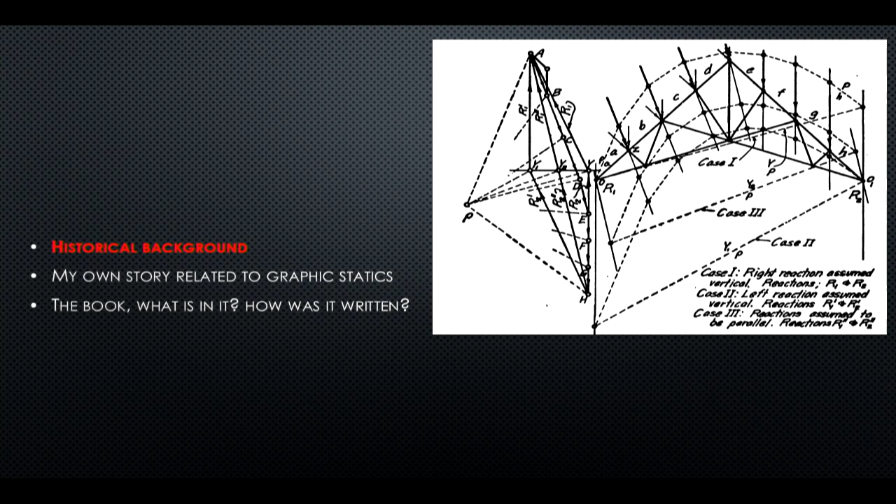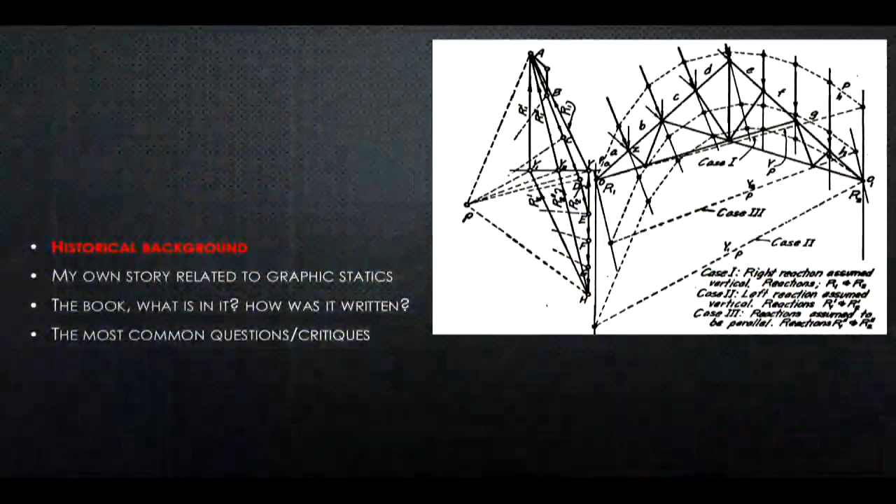And then I want to talk about my own story. How did I get involved in this process? Some of the people that I merged with and I consulted with over the years. People often ask how long it took, so that's one of the frequently asked questions. And then I'll get into the book itself, kind of a description of graphic statics, a little bit of what motivated me to choose the topics, a whirlwind tour through that. And then I put together commonly asked questions and commonly asked critiques. So the last part of the talk is me answering some questions that people have asked over the years.

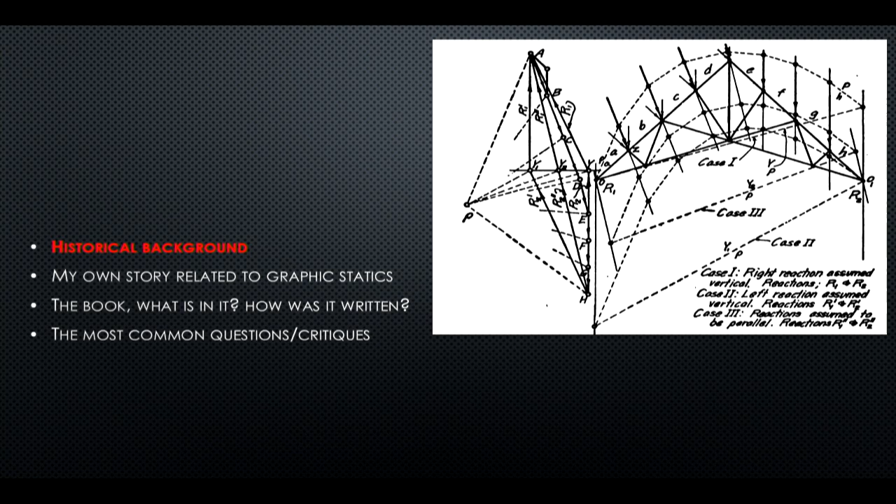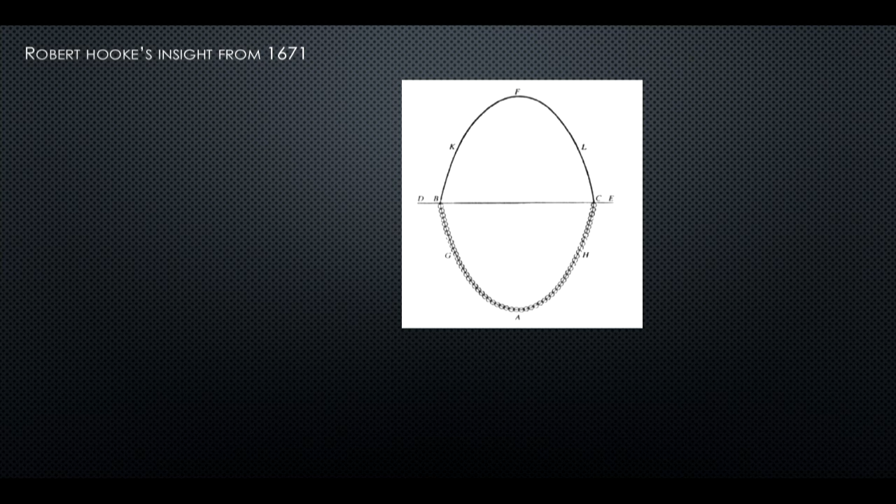Okay, so we begin with this picture. And Robert Hooke, 1671. So we're in the 17th century. Most people in the room, if you're an engineering student, will recognize Hooke from Hooke's Law. But we use Young's modulus in Hooke's Law, so that's another whole long story that we won't get into. But Hooke was a fascinating person and very mysterious, and some people say he was a real jerk to his colleagues, but he certainly didn't trust his colleagues. So the insights that he had were cryptically written in notebooks, on the margins of notebooks. So those Moleskine notebooks that you're writing in right now, those will be collected by your biographers. So take care, collect the notebooks.

And here is what Robert Hooke wrote. The true mathematical and mechanical form of all manner of arches for building, with the true abutment necessary to each of them. A problem which no architectonic writer, I think Doug is an architectonic writer. I don't really know what an architectonic writer is, but no architectonic writer hath ever yet attempted, much less performed. And here's the answer.

And incidentally, I want to have a manservant, right? This is really cool. If you have a manservant to take care of your notebooks, you've made it. So the manservant found the notebook, and the manservant was good.

He figured it out. Has anybody figured this one out yet? Raise your hand or shout it out if you figured it out already. The answer is ut pendet continuum flexile sic stabit contiguum rigidum inversum. So I don't know how many of you went to Catholic school and studied Latin, but I think you could put it together, right? As hangs the flexible chain, so stands the rigid arch, but inversed.

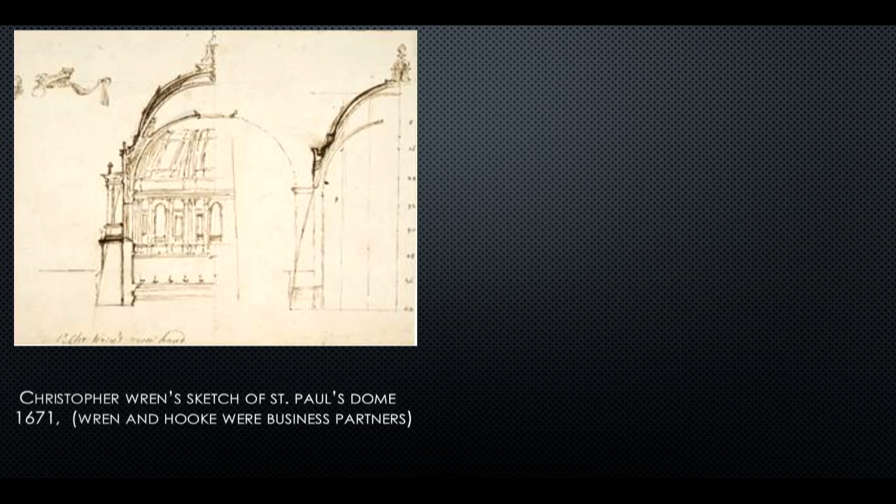So that idea, and this is a crazy part of the story, was taken by, who is this on the left? Can anybody take a guess? Robert Hooke's era. That idea was taken by Christopher Wren. Christopher Wren and Robert Hooke were business partners. After the Great Fire of London, there was huge work in infrastructure renovation. So these guys were business partners.

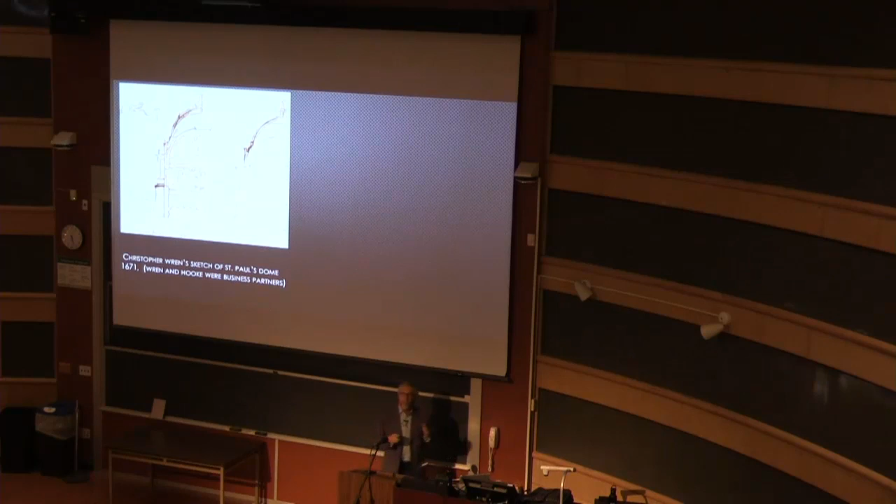They were making money. And Hooke whispered into Wren's ear, hey, I heard you're building a church. It's called St. Paul's, right? Yeah. Why don't you use this chain mechanism? So it's like a secret. The chain is within the two vaults of St. Paul's. It's not one vault or the other. It's buried in there. That's in the 17th century.

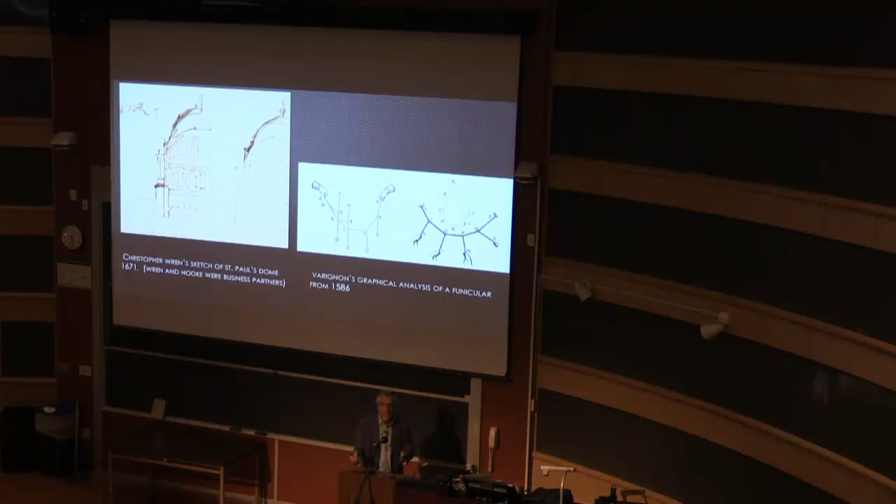But if you're a real historian, you just keep going backwards further and further, all the way back to 1586, and Varignon used this technique. And I love these pictures by Varignon here. On the left, we have somebody holding up a rope, and we have four forces. Gravity is down, so those forces are vertical forces, and they're pulling the chain down, and the chain is straight between the forces. I think it's intuitive. Somebody nod. It kind of makes physical sense. Thank you for that nod, Rob.

So now Varignon takes it one step further, and I love the little hands, all the little hands here, right? They're all pulling, and do you notice they're pulling at different directions here, right? So they're not just pulling down. I think many archies in the room and many architecture students in the room would have trouble solving the statics of the picture on the right. It's not a trivial problem to solve algebraically.

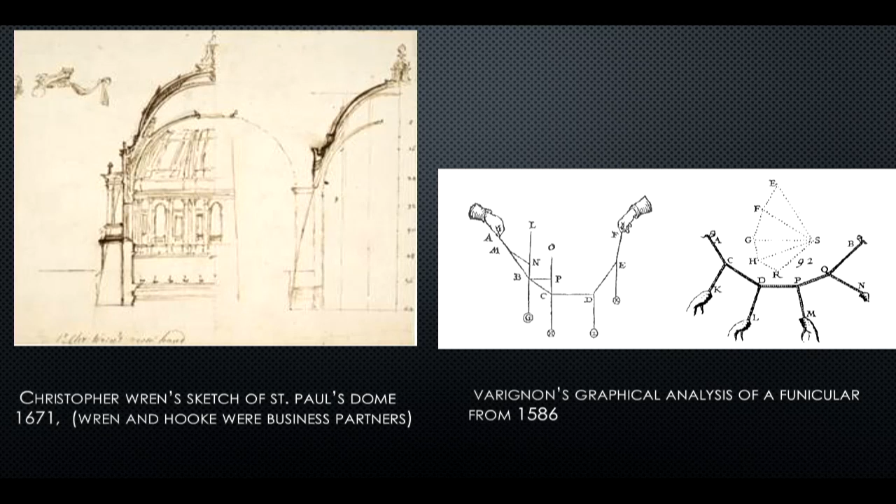And it was solved closed form exactly by Varignon in 1586. One of the things that drives me crazy whenever I talk about graphic statics with other engineering professors is they say, well, I do graphic statics, you know, I show some of the forces as a bunch of vectors adding up. So what do they mean by that?

They say, well, there's a force here, and that's this guy's hand, letter K, and I'm showing it as a red arrow because Al knows that forces are red in nature. And we draw it to a different scale. This is important here. The scale of the force diagram that I'm going to sketch up here has to be comfortable to fit on a page.

This might be 100,000 pounds or 750,000 pounds in a structural engineering application over a 30 or 40 foot span or whatever it is. So you draw the form to some scale, and you draw the forces to another scale that is independent of the first scale. They have nothing to do with each other. So you draw a diagram of your form, and on the same page you draw a diagram of the forces.

The forces now, I think everybody in the room knows what's happening here. You do this in physics, right? Head to tail, head to tail. This is vector addition. And at the end, there's an equilibrating force. And what is the equilibrating force going to do here? It's going to go up or down. The equilibrating force, this is the easy part. Up, yes, it's going to go up, right? And we're showing it as a dashed line. This is not graphic statics. This is simply vector addition.

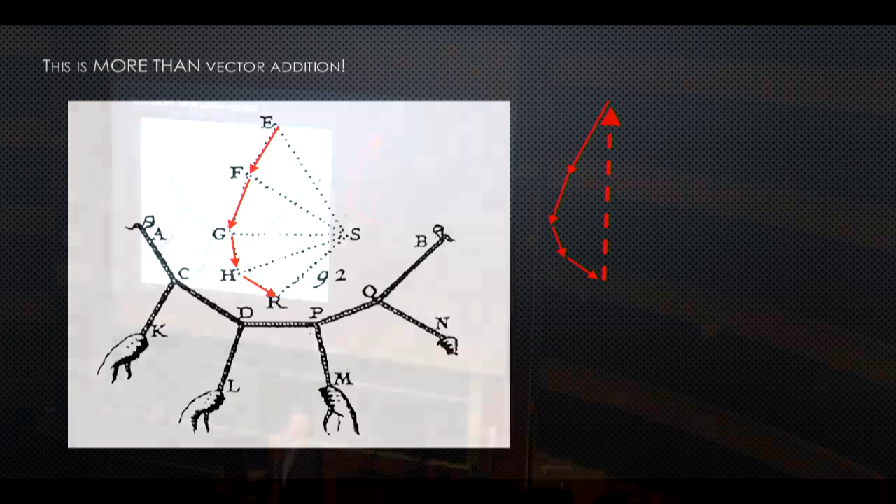There's something else in this picture. Not these guys with the hands, but this thing here. This is called the force diagram. So this is the form diagram. This is the thing that we're designing and the thing that we're analyzing. And I'm going to talk about that a little bit. This is a design tool and an analysis tool simultaneously. And this is the force diagram.

If you move the pole, you can get larger forces and a smaller sag in the cable. So the form diagram and the force diagram are linked, and they are reciprocals of each other. So this idea is super profound, this idea of reciprocal geometry and projective geometry. So in the 19th century, mathematicians studied projective geometry. In the 19th century, civil engineers studied projective geometry. Projective geometry, that thing that art students study now.

How might something in 3D be projected on horizontal planes off to the side or vertical planes? So this idea of depth of field, perspective, all of that, that was studied by mathematicians, and civil engineers could do projective geometry in their head. One of the major authors of projective geometry was Luigi Cremona in 1888, and Cremona wrote a book on projective geometry, and he was using these graphical tools to solve calculus, to solve differential equations.

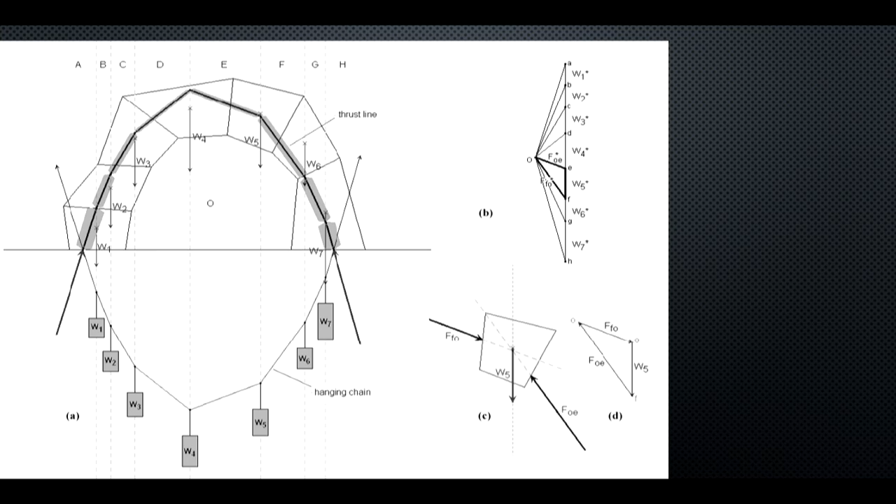Gothic masons knew these secrets, not as graphic statics with rigorous analytical tools, but with a study of voussoirs. How much does this block weigh, this beveled block that's cut? That's W3, and there's W3. How much does this voussoir weigh? That's W4. It's coming down. And the Masons Guild, that secretive Masons Guild, which we still have even in San Luis Obispo, we have a Masons Lodge downtown, they had it in their notebooks about the link between form and forces. They didn't have this, though.

This is the force diagram with that arbitrary pole, but I put that in here so that you see the parallel lines of the force diagram linked to the form diagram.

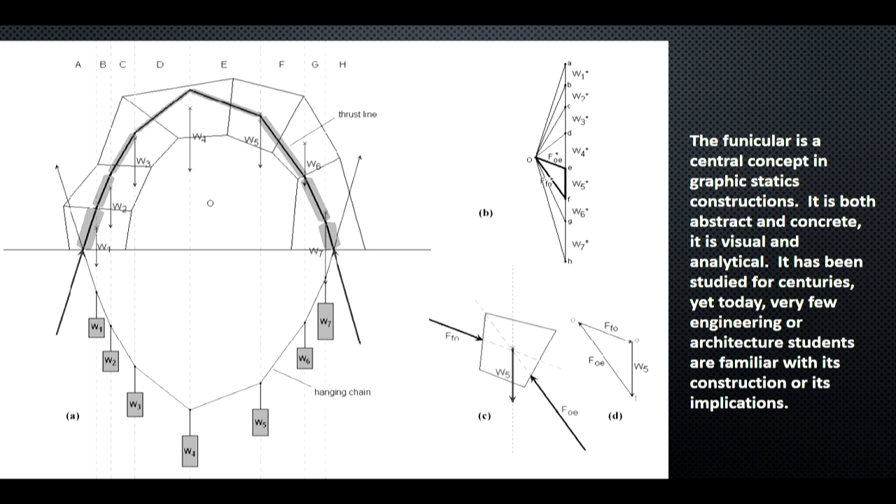So one of the weird things about this, when I study this, my head is exploding, because I went, as Al said, to pretty big name schools, right? Nobody ever mentioned this to me in the history of my life. And when I look at it, it's so profound when I realize people have studied this for centuries. Every civil engineer on the planet knew this material in the early 20th century. This was part of a civil engineer's and an architect's training. What happened? Well, we'll try to unpack that in the fourth part of the lesson.

So in 1888, we have Professor Carl Culmann really codifying this with his classic book, which is really out of print. I don't have this one, Graphische Statik. And Ritter was the professor or a colleague of the chief designer of the Eiffel Tower. My Arc E 260 students, who was the chief designer of the Eiffel Tower? Maurice Koechlin. Let's give Sarah a round of applause there. Very nice. So Ritter worked with Koechlin on graphic statics. The Eiffel Tower was designed and analyzed exclusively by graphic statics. We do it in a simple way in Arc E 260.

Ritter was a colleague of Koechlin. Culmann was a colleague of Koechlin. Culmann was Ritter's professor at ETH Zurich, the finest architectural engineering school on the planet, despite what my boss says here. It's ETH Zurich. And Ritter was Robert Maillart's professor. So Robert Maillart, who we know from our history class, Salginatobel Bridge was a masterpiece of graphic statics. Culmann was Maillart's grandfather in some sense here.

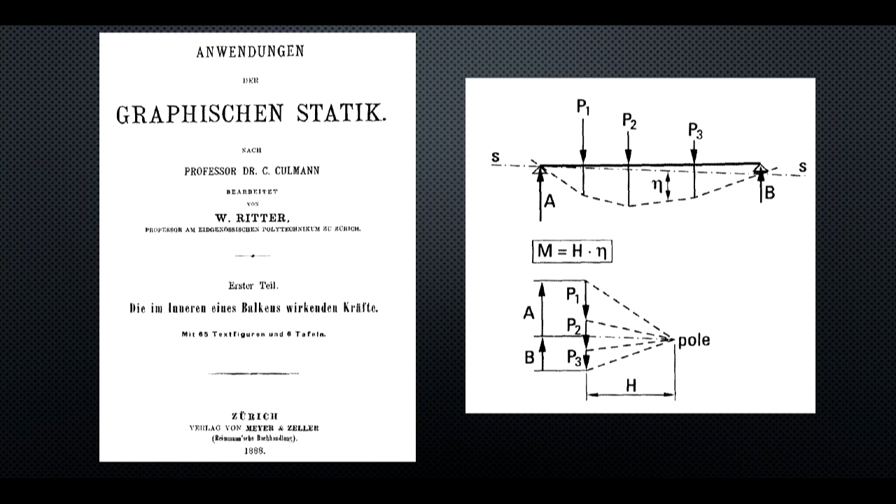But look at what Culmann is saying. Okay, ladies and gentlemen, if you order today with graphic statics, you can get equilibrium, no problem. You can get the centroid of forces, no problem. I didn't even talk about it, but it's in the book. You line up the trajectories of the beginning of the form and the end of the form, where they intersect, that's the centroid of all your loads. It's easy peasy, super easy. And it makes a ton of sense because those are axial forces. Everything boils down to an equilibrium of a point.

But Culmann is saying if you order today, before 6 o'clock, I will throw in something. And most people in the room should be able to answer. What is he going to throw in at no extra cost for a beam subjected to lateral loads? What does this look like, ladies and gentlemen? That thing under the beam. The bending moment diagram. So you get the bending moment diagram for no extra charge. How do you get the bending moment diagram? This is crazy. Watch what happens.

You make a funicular, you just put a pole down, it doesn't matter where you put the pole, and the funicular starts at the pin. You really have to start at the pin because there's two unknowns there. And you draw the funicular, and it ends where it ends. And then you draw a line back to the funicular. That's called the closing line, this dashed line here. The vertical distance from the funicular to the closing line multiplied by the horizontal span of your forces. This is a force diagram. This force times this distance is the bending moment at any cut. It's super, super cool. And it works exactly.

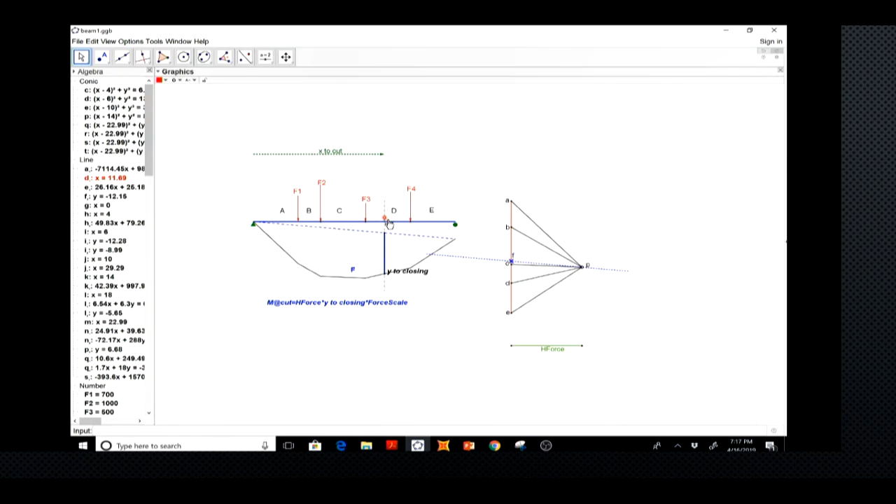So how can this possibly work? I'll just breeze through this really quick here. So you drop down loads from A to B to some comfortable diagram. You put the pole wherever you want. This is the closing line. And you can make the pole anything you want. The closing line ends where it ends. It's that distance multiplied by this, and I call it H force, a horizontal force. It's actually the horizontal force in the cable. If this was a physical cable, it would be the horizontal thrust, which is going outwards for us in that problem there.

The highlight, the zenith, the best moments of graphic statics happened in 1921. And people ask me, who's your competitor for the book? This is my competitor, and he kicks my butt. This book is amazing. I mean, it's totally amazing. You can get it as a PDF for free. I don't recommend that, though, because there's plenty of copies for like $7. You could still get this book by William Wolfe. Our dean has this book on her bookshelf.

This is an important book. It's literally amazing. The stuff that he does in here is overwhelmingly beautiful, incredibly detailed, richly complicated. Here he's analyzing an enormous truss frame object, and he's designing it simultaneously. You get every force in every member, and you could redesign everything. I can redesign everything by sliding a mouse, but he would have to redraw these pictures. But the geometry was not overwhelming for these people who knew projective geometry.

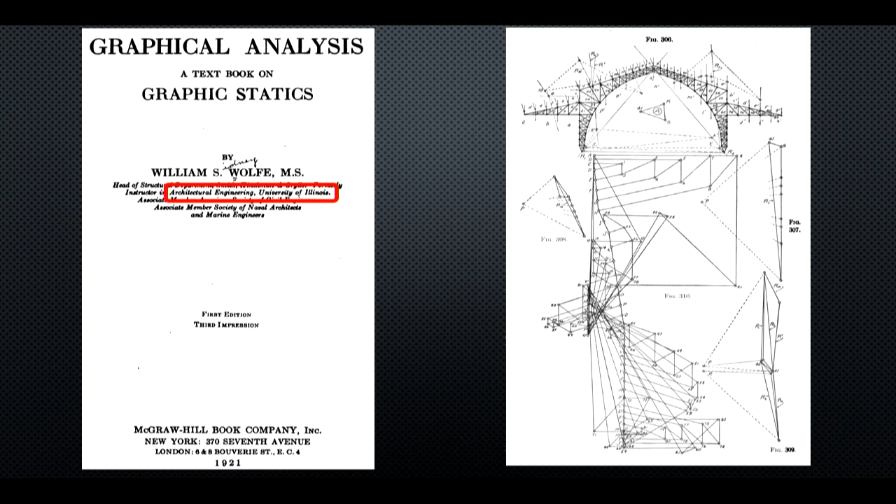I want to give a little shout out to architectural engineering here. He was a professor at my alma mater, University of Illinois. And I channel this guy. You know, Scale Factor can attest to me dropping some F-bombs at the dining room table while I was writing the book. But I'm channeling Wolfe. Like, I really got into his head. I think he was whispering in my ear.

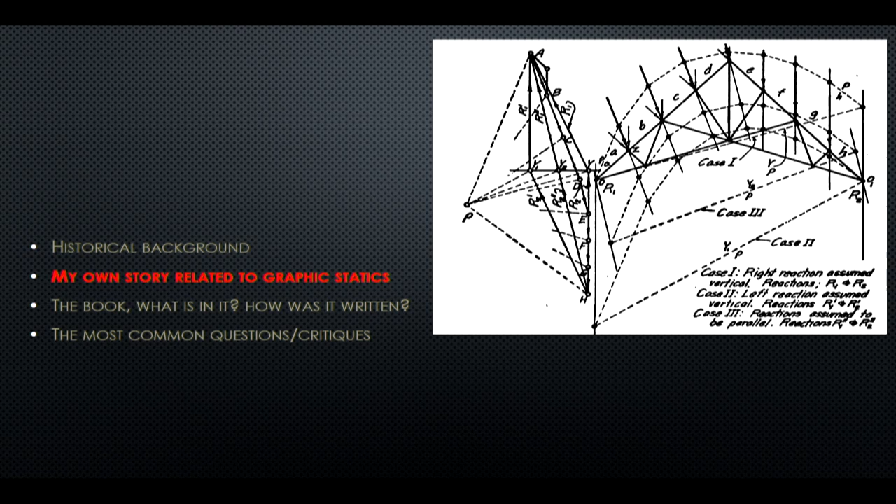Just want to talk a little bit about this picture one more time. This is a crazy example, and I recreated it in the book, but I gave him total credit for it. It's a truss. It's got gravity loads, and it's got wind on one side of the load, but it's an indeterminate truss. There's a pin at the left and a pin at the right. And what Wolfe is doing, he's saying, how can I shape the truss for this load such that the horizontal component is the same on either side so that I can simplify my connection design? And he goes through three trials in here.

And this is so deep, I can't overstate what's happening here, because this is the link to the Airy stress function, which I've talked about with the graduate students a few times. There's a direct link between these shapes and the Airy stress function, which is a super high-end theoretical, but practical construct. Okay, so that's the historical background. I'll speed it up a little bit.

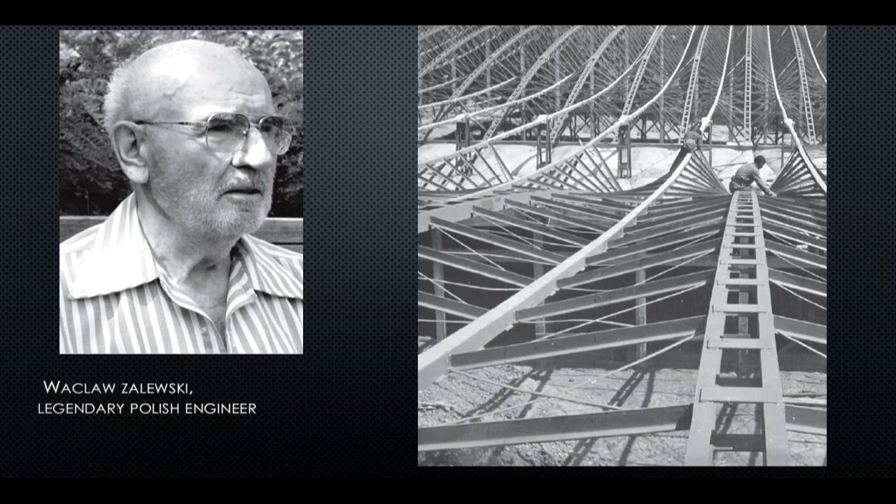My own story. How did I get involved with all this? It really does begin in the modern era with Wacław Zalewski, a brilliant Polish engineer, and then he became an educator at MIT. Zalewski died, but he lived a good long life. I think he hit 100. I spoke to him on the phone a few times, and he was totally blind for many, many years at the end of his life. But he wrote these books, being blind.

And I asked him, I said, how could you have such powers of concentration? And he says, when I was a young boy, I fled the Nazis, and I hid in the forest. And I learned to concentrate when I was hiding under a tree in a forest. This is what he told me. And he was an engineer, and this is a grocery store. It's called the Super Sam grocery store. It's a gigantic grocery store in Poland, and he's using graphic statics to design and to analyze these magnificent structures.

So Zalewski meets Ed Allen, and most of the architects in the room know Ed Allen. You've used the Architect Studio Companion, the big fat book. He's written a whole bunch of books. So Ed Allen partners with Wacław Zalewski on the first book, and it's called Shaping Structures. And that title is really nice because this is a design tool. This is not primarily an analysis tool. This is really a design tool. What shape should I have for my building such that I can control the forces, even if it's statically indeterminate?

So they came up with this book. I must admit, I was given this book. You know, professors get books, and I opened it up. I'm like, what the heck is this? Like, I had no idea what was going on. I didn't learn the material. I kind of put it aside. And a lot of other people did the exact same thing. So the sales were really pretty bad on Shaping Structures.

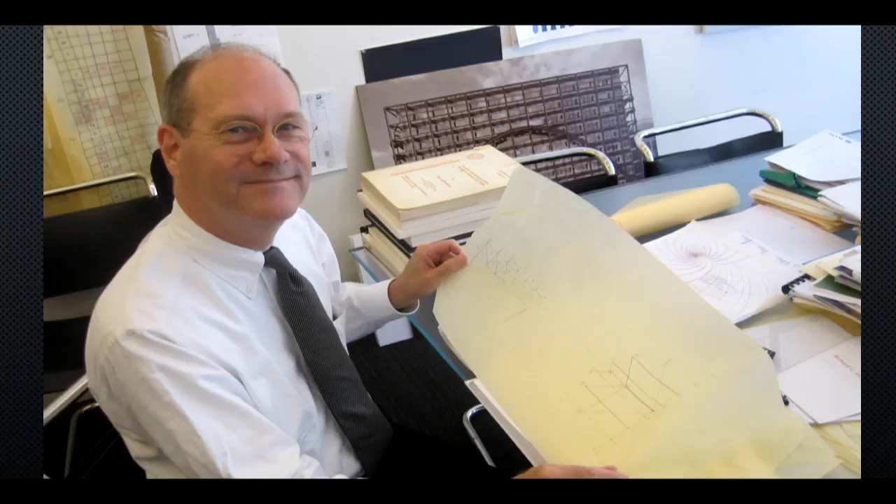And then something else happened, and I think it's really important to shift gears slightly. John Ochsendorf's student who didn't show up on this picture is Michael Ramage. Michael Ramage and John Ochsendorf designed and constructed the Mapungubwe Interpretive Center in South Africa. They used earthen tiles that were made by these workers, thousands and thousands of these tiles, which are not really good material. So they're using crappy material, and it's a labor-intensive process, but they're paying a living wage to a dozen men who fed their families for a year and a half during this project.

So there's a huge social critique here that is very important. The scientific critique is the graphic statics. The social critique is, can we use the world's worst material in a highly efficient way and pay people living wages to make it? Not a robot 3D printing it, but people building this. And there's a lot of fun stories about this, about the work ethic of South Africans, what it means to work hard. They quickly became experts.

This is a Catalan vaulting, which is what Guastavino used, and that's John's influence. It's a quick-setting mortar with no scaffolding. So you don't need any scaffolding when you're making a funicular Catalan vault, because the weight of this tile is held in place by this quick-setting plaster mortar.

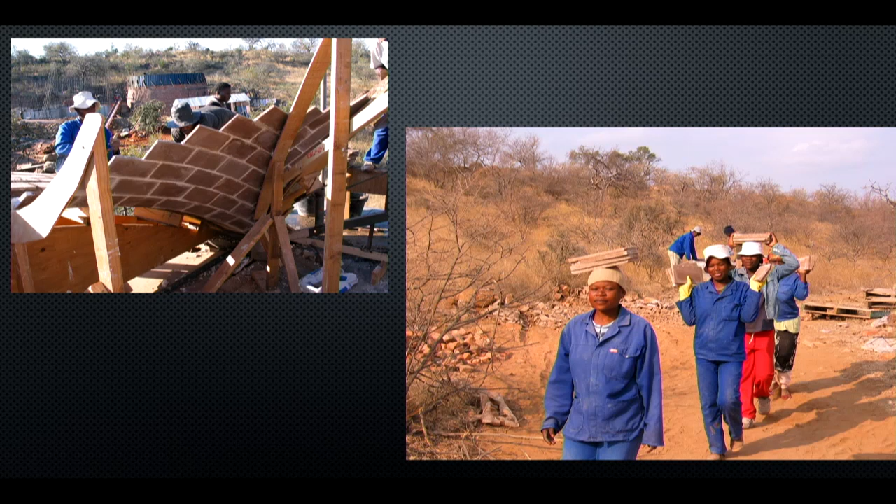And you may say, well, wait a minute, I see formwork. And that's not formwork. These are three-dimensional guidelines to build the building. They're just three-dimensional curves in space that are telling the workers where to put the tiles.

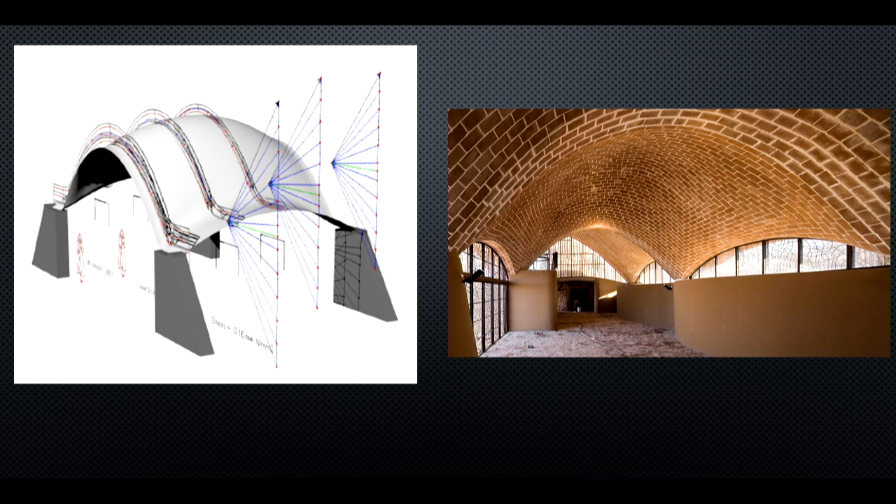And this is the first building in the modern era to be designed with graphic statics, but it's 2D slice form. So the architects in the room know what I'm talking about when I talk about slice form. Taking sections and looking at slices, and again, envelopes, no seismic. It's at the northern edge of South Africa, wind loading. So they're getting an envelope of thicknesses.

And then they did a seismic test just to learn, and this was really cool the way they did it. They said, we can do graphic statics for those vertical loads, those weights that are just hanging. And then they said, well, what if we lifted up the shell and the shell is sideways, but it's only subjected to gravity? Now the gravity is going down, but the shell is tilted. So there's a vertical component if you flip it back and a lateral component.

So they did that. They tilted the shell on paper to do the graphic statics, the force diagrams right here, and they came up with a spectacular structure. So at this point, I'm completely besotted by graphic statics. And a 15-year journey or so begins.

And I have maybe the world's greatest collection of graphic statics books because there's very few people interested in these books. And I bought them for like $7, you know? And they're gone now. There's hardly any. Like this one is gone. I have one in my office right now. There's 2 copies of the book, and I got it from Columbia. There's only 2 copies left in the whole world. But this is super cool.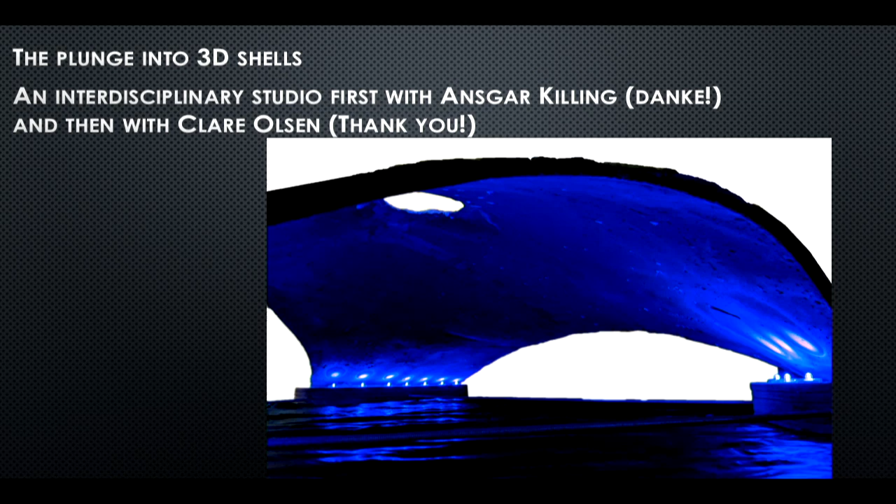I use the analogy of just pouring water on the shell, and it'll flow right around the hole, right around. A little bit of tension where the water separates, and then compression again. So we have some spectacular things.

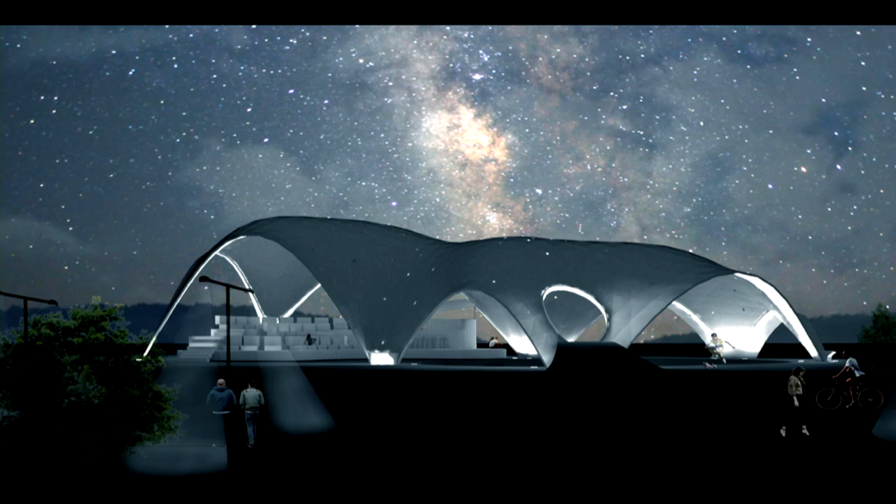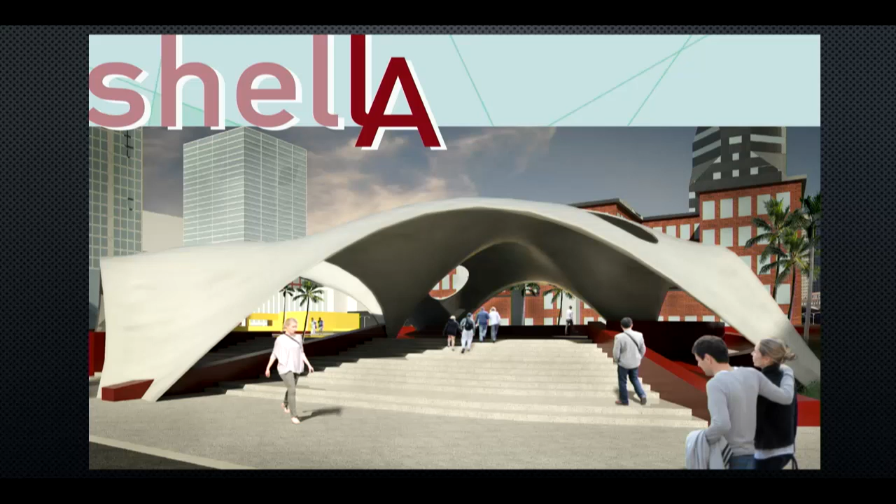We do this in 10 weeks, 3 weeks of design. So they're done in 3 weeks. Then 3 weeks of analysis, and we do buckling, we do seismic, we subject it to Northridge, to IBC, and then 3 weeks of construction planning, and then we actually build it. So different sites. Clare and Ansgar always pick the sites. I love it. And most of the structures then are breathtaking at the end, regardless of how we did it.

So this is one of the earlier ones. This is one of the later ones, and the classic sort of picture of architecture students sitting on their shells that you've seen in the history books of the college. We try to recreate that. We celebrate it with some California grape juice here under the moonlit sky.

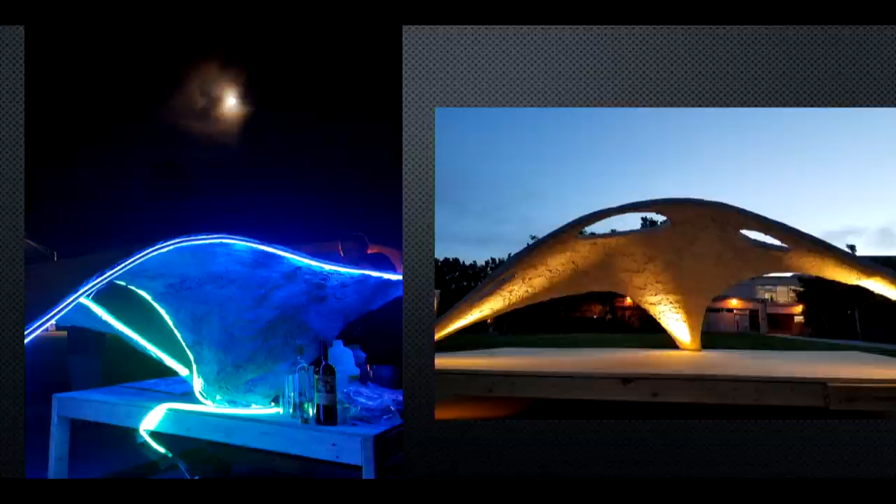And then one of the student groups really did an homage, and again, this is Clare's idea, an homage to Candela, with perforations. Our Uncle George was the editor of Arts and Architecture magazine, and on the cover of Arts and Architecture magazine was a Candela warehouse that had such perforations.

And then, shout out to Vince. I don't know if Vince is here. In the last studio, I said, these guys were really good. And I said, I love the sketches, the pen and ink, the watercolor. Could you show us how this becomes like a shell, through Karamba? And Vince says, yeah, I could do that. So let's see if we could do it, Vince. Come on.

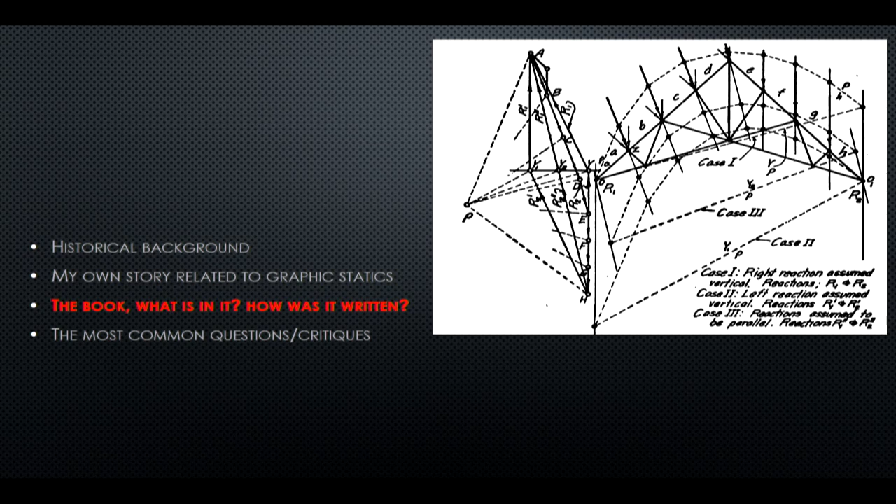Hopefully we'll get a low respectful whistle out of this if this works. Right? B+ work, right? And then a Sugimoto photo here. So these are still out there. We're going to tear them down next week. So go take a look at them. Super fun.

Okay, so the book itself, I'll breeze through this pretty quick here. It was published by Springer International, prestigious international publisher. Who's the audience? I think you are the audience, and I mean everybody in the room. If you're an architecture student, a high school student, or a retired person who just wants to do something other than Sudoku puzzles, you could do this, right? I think you could do graphic statics to just stay sane, right?

Everything that Wolfe does, and then I added the shells, but I don't do anything as deep as Wolfe did in 1921. So obviously 2D determinate, everything is in there. 2D indeterminate, everything is in there. Frames and shells, points in space, and everything is done.

I drew every picture with GeoGebra, which is a kid's program. So this is a children's program to teach them geometry and algebra. It's a free program. You could put it on your phone. I use it on the airplane on my phone, and I talk to the people sitting next to me about graphic statics. And then they ring the bell. Can we change seats? But the people who design GeoGebra are geniuses also. They're all Cambridge mathematicians. There's 3 people. And they made this program that is completely 100% parametric.

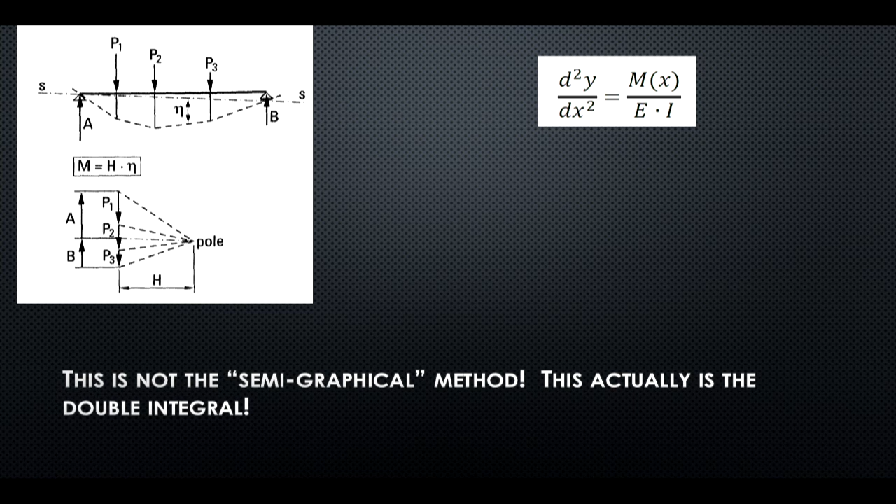So, anyway, this is another thing that drives me crazy. Well, isn't this the semi-graphical method that we've been doing? No, it's not the semi-graphical method. What this is relating the displacement to the bending moment, but not through this differential equation. This is the classical differential equation.

This is not the displacement of the beam. This is the hardest part to understand. The beam, a virtual chain out there, takes this shape. The beam does not take this shape, because this doesn't even end on the support. It just ends wherever it ends, right? So what's going on here?

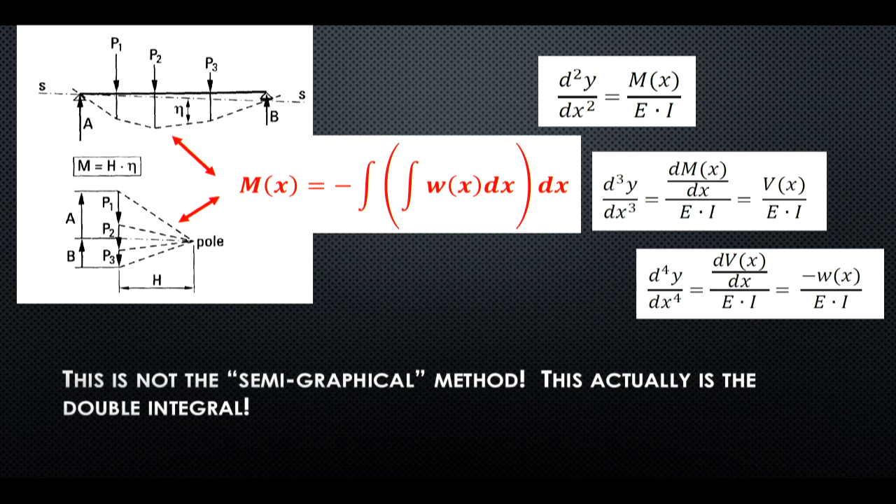Well, the derivative of the moment is the shear, and the derivative of the shear is the weight. So what this is doing, and this is why Cremona, the mathematician, was doing this, this is a double integration. So this process of drawing these lines is actually a double integration. That's why it is exact. This is an exact method. It's not approximate. And it's so unbelievably easy that you could do it on your phone. You could do it on a napkin, right?

It really does work. So real quick video of just how to construct this. It's super fun. You pick a pole, any pole, and you just start drawing lines, and you snap it to where the load intersects. So if it was a Varignon picture with the hands pulling, the trajectory wouldn't be vertical. And you just keep snapping like this. It's actually quite mesmerizing. And you end where you end, and then you draw a closing line. And that's it. That's the whole method. The width of this is H-force.

And if you wanted to make an arch, you just flip it over, and it becomes an arch. So it's super, super easy, and it's super intuitive. And then if I pull harder, I have less sag in the cable. But this is not about designing a cable. Let me get into that, what it is and what it is not. So it's an exact method. It's not an approximation. It really shines as a design tool, but of course you can analyze structures with it.

The other cool thing about this is that the more complicated the problem is, it doesn't add any burden on you as the person running the machine. And the exact opposite is true in algebraic statics. If you have a bunch of problems, a bunch of loads, you're going to screw this up somehow. Like if it's a complicated truss, you're going to screw this up. Complicated truss with lateral loads or a frame. You can't screw this up because it's the exact same technique over and over again. It doesn't make any difference how complicated it is, and the key is the funicular.

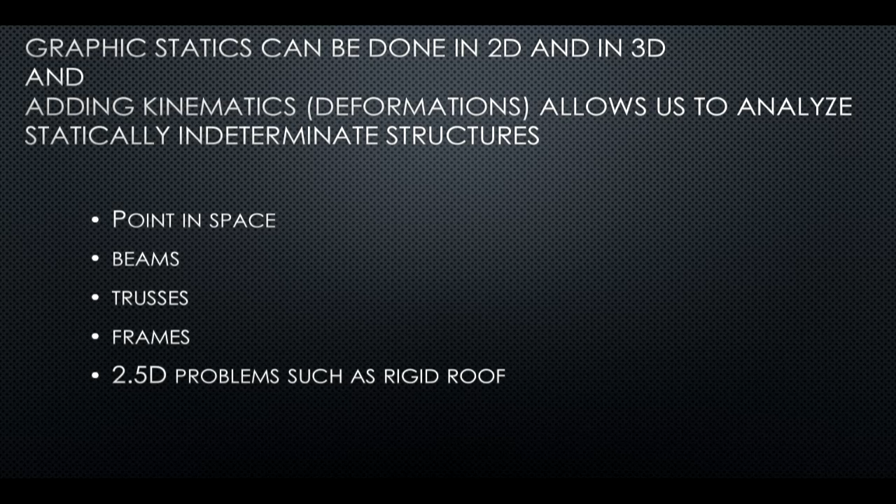In the book, I also added a chapter on what Guy Nordenson actually coined at Princeton, the 2.5 dimension problem. We call this the rigid roof or the rigid diaphragm. It doesn't matter, but it's a roof that's suspended on columns, and it's being hit by lateral loads. It's really a planar problem. If you look down on it, it's a plane, but the height comes into effect when you look at the bracing.

I know the bell's ringing, but I didn't start at 5, so I'm just going to keep going a little bit. And then shells, just a little bit more, and then we'll answer questions.

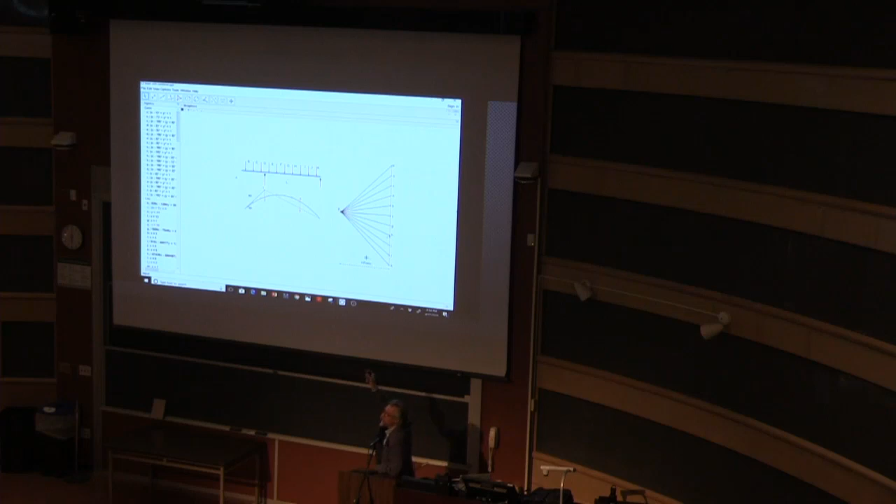So now, just to kind of get you familiar with the idea of slightly more complicated problems that could lend itself to formal ideas. Here's a beam with a cantilever, and the loads, of course, are laid off by some scale over here. The pole is arbitrary, and I can change this shape, and I can truss up that shape. I can make a Vierendeel truss out of that if I want, and that's exactly what I'm doing with my seniors right now.

And you would maybe use that shape if the Vierendeel is below the deck, if it was a long span structure, or maybe it's above the deck. We see evidence of that even on our own CM building on the walkway going over between that building and building 21. So it could be a form-finding tool, right? It's not just an analysis tool.

And then there's one more lesson in here on why this is such a great learning tool for architecture students. So here's a truss. It's asymmetrically loaded, so these two loads are bigger than that load. And now I want to get these internal bar forces, because this funicular is only for the external equilibrium.

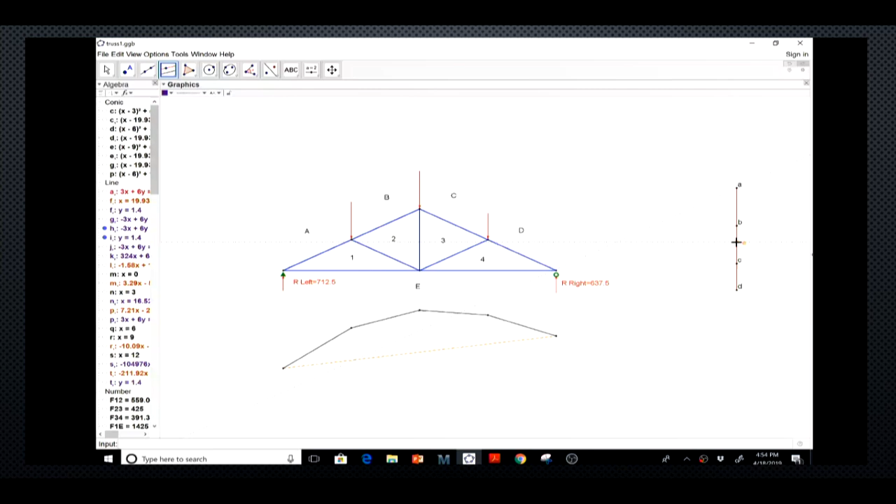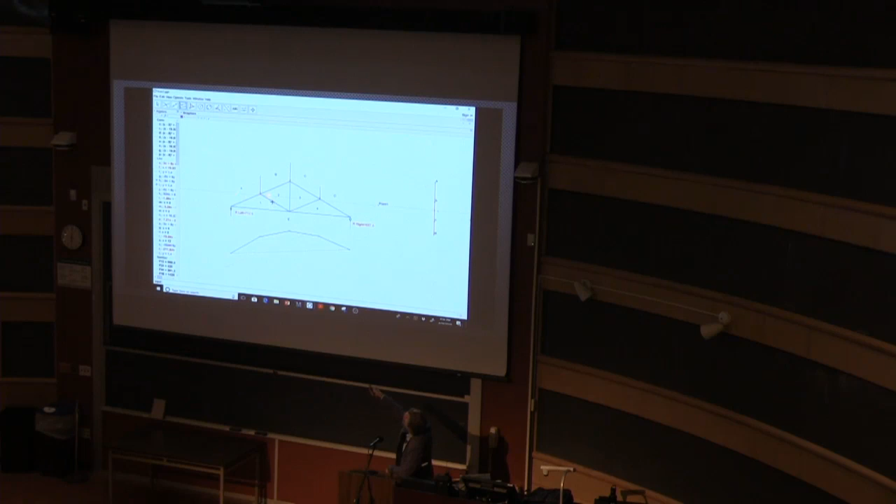What if I want these internal bar forces? Well, I just use the same construction to get these points, and it's completely analogous to method of joints. I would start here, where there's two unknowns. I wouldn't start on the interior, and I would locate point 1, and I did that by this slope, which is common to A, and this slope, which is common to E. So 1, I cut that through, and then I can move on to point 2, just like I do in algebraic statics. So I would not attack this number first. I'm not finding a joint, I'm finding the number, and once I have the numbers, then the problem is unlocked, because this is a force diagram.

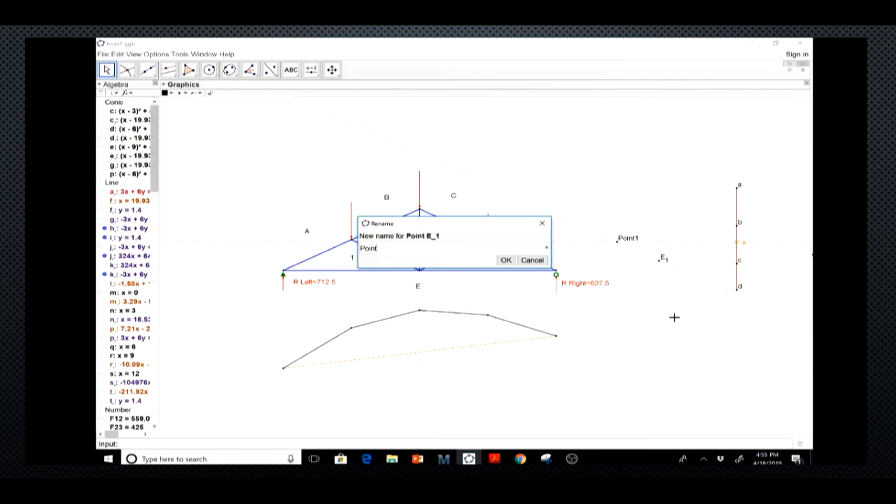So if I draw a picture describing going from this to this, that would be here, and this is drawn to some scale. That's the magnitude of the force in this element right here. And if I draw an element from here, that's this element here. This is the force in this element.

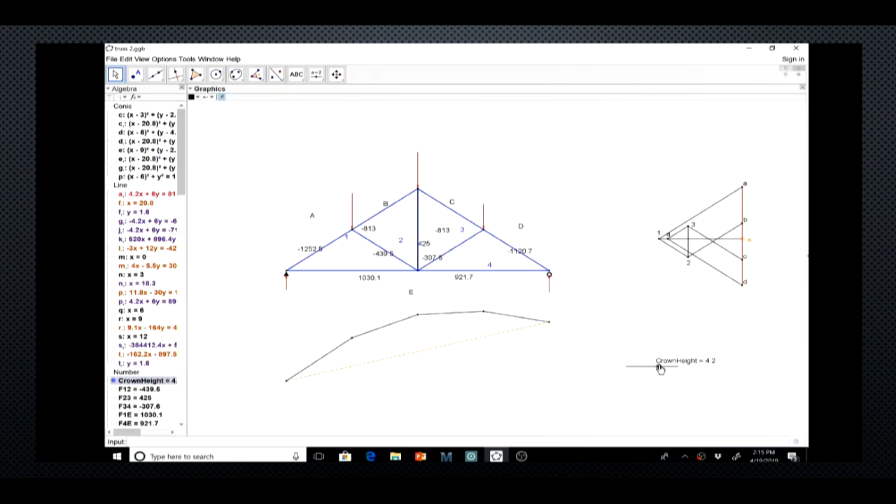And if the architect says, well, I want a more slender profile for my truss, I don't want that big steep truss, you can say to the architect, that's not a problem whatsoever, because I have GeoGebra, right? So you don't like this tall truss? Fine, let's make it slender. What's the force in that element right there? You show this to an architect, and they understand immediately the implications of that slenderness. It's graphical, it's intuitive, you get feedback right away.

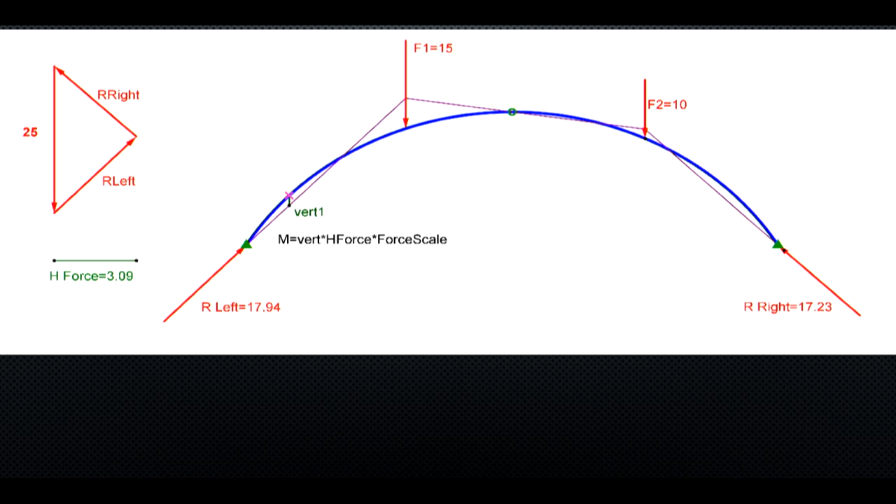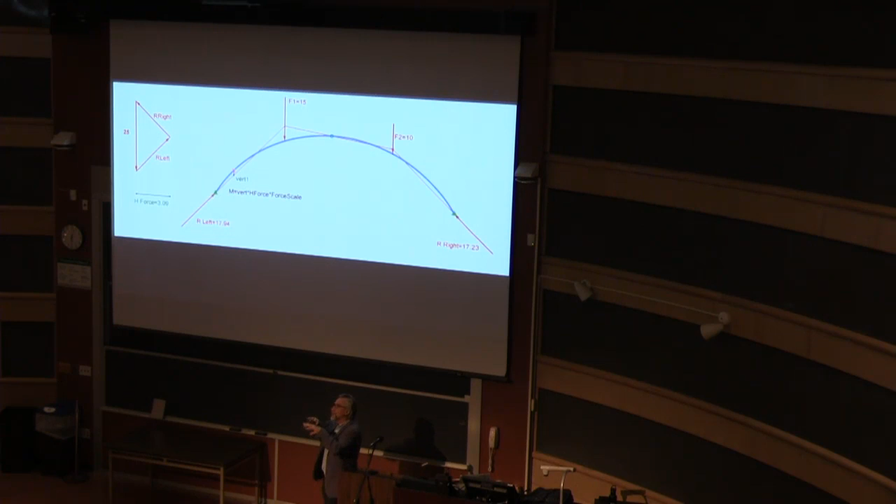And then for arches, it's super interesting. It goes back to this medieval Gothic idea. Here's a 3-hinged arch. I'm not going to go through the construction of the funicular, but the funicular is the purple line here. You can kind of see it like a string being pulled. I mean, I did it for anti-gravity here. But where the arch strays from the funicular, you're going to have more bending, right? And for an envelope of solutions, you could come up with an extremely efficient structure visually linked to each other.

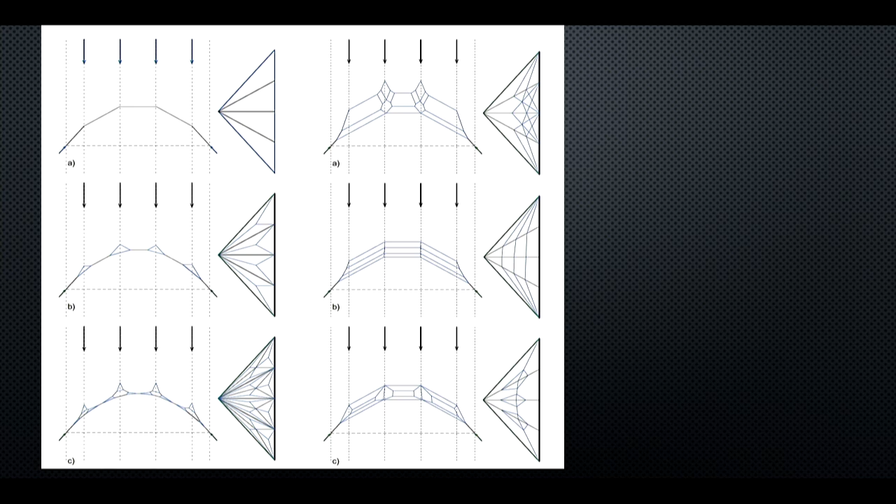And then Masoud, Philippe's student at ETH, said, well, wait a minute, what else can we do with this? So he's in the 2D world. Let's start with the 1888 funicular and find the centroid of each of these panels. You find the centroid of that, and you start branching off, and you come up with amazing structures. An infinite number of possibilities, all 100% rational. All of these are funicular. None of these have any bending whatsoever. And you'd be hard-pressed to generate so many ideas so rapidly by any other technique.

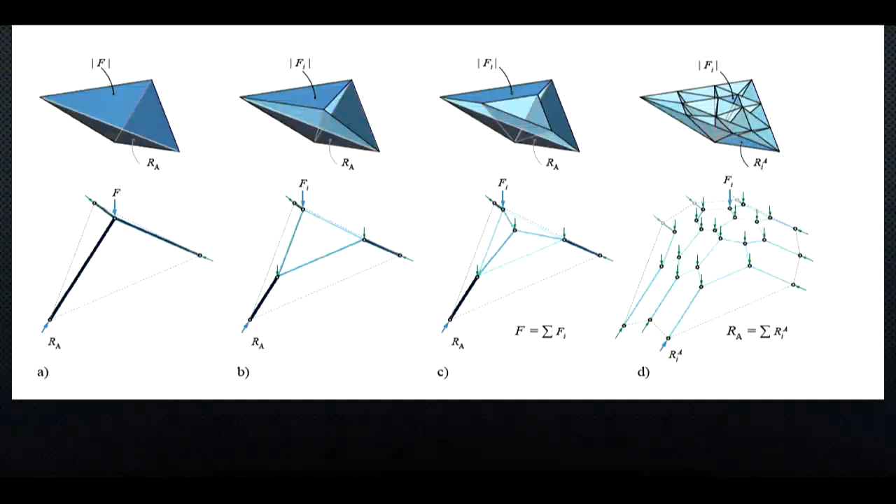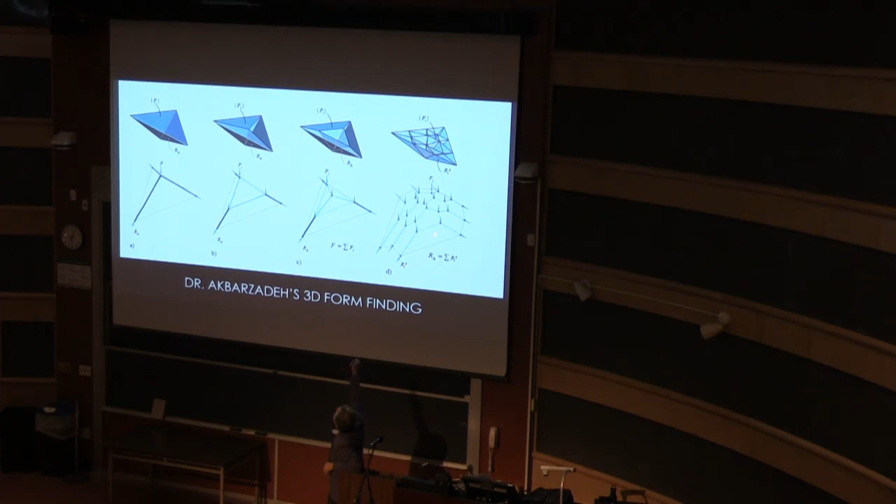And then Masoud did it in 3D, and this is what we did with the students in the studio. The faces of the polyhedra, the area corresponds to the magnitude of the force. And you could bifurcate or branch as many times as you want, and you could develop a shell shape. I didn't do that with the last studio with Claire in the winter. It kind of became a black box. We used Kangaroo and Grasshopper, and one group did use RhinoVAULT, the Philippe Block tool.

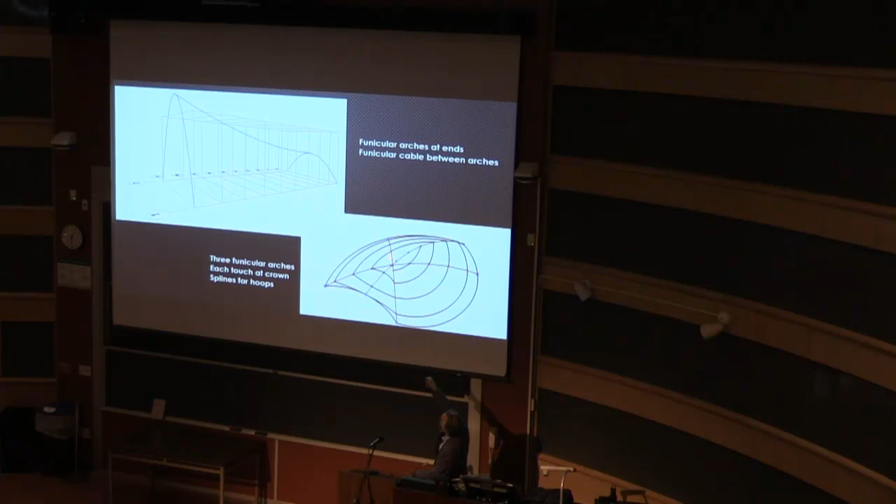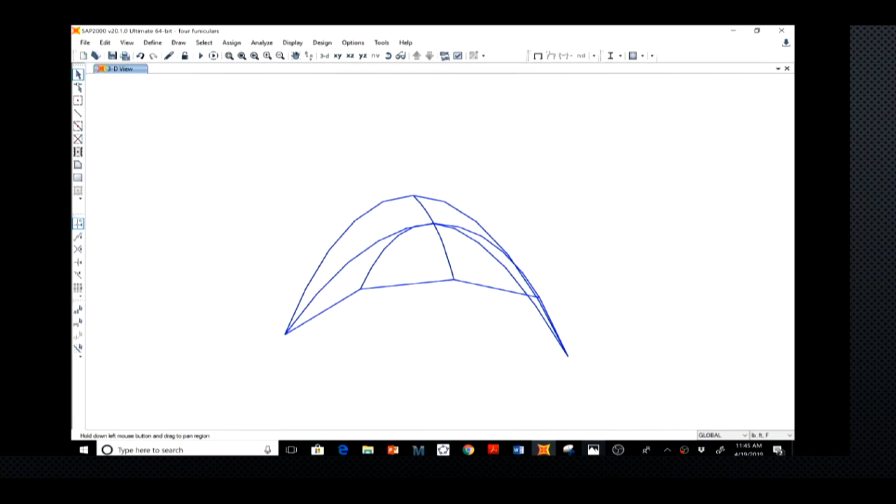But right now what we're doing with the seniors is thinking about using a parabolic or a funicular kind of, and they're hyperbolic paraboloids, but for the purposes of the talk here, just think of this as funicular and that as funicular, just as slice forms, and then you could drop another funicular between these, and you could make spectacular spaces. Or this one, which is a little more complicated, this is in the book, what I have is one funicular going one way and another funicular going another way, and they kiss at the crown. I have a little video just to show you the geometry of it. So they kiss at the crown right there. So there's a funicular, then I made one in the front, and then one in the other, and that took 5 minutes. It's literally super fast, and it's extremely, extremely efficient.

Okay, so now the last part, we're almost done. The most common questions and critiques. So I call this frequently and infrequently asked questions. Okay, so the first is obviously the most common one I get. What is graphic statics? And I think I told you, it's a centuries-old tool. It's exact, but it really shines as a design tool. It's a form-finding tool to shape structures.

That's why Zalewski and Allen's first book was called Shaping Structure. So I think I got that one done. Why is graphic statics so good, right? Well, I hope I answered some of that.

It can solve any problem that we will have in the undergraduate curriculum, and it has implications even in the master's program if you take it into that Airy stress function idea. So I think it's super, super malleable in its applications. You could do this with freshmen. You could do this in our graduate program.

All right, the third question. If graphic statics is so good, why doesn't anybody teach it? That's a good question, and it's a difficult one to answer. Graphic statics was the thing universally in the beginning of the 20th century, and it disappears. Like by 1950, 1960, it's gone.